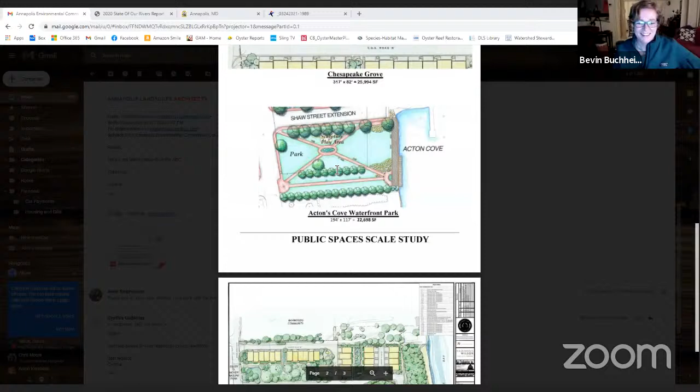It was a one-page introduction, then an enlargement of the park, and then an illustrative of the whole site. So the third page in that - I've got it up. Can you see my screen? Thanks, Allison. Is this what you're looking for? Yeah, if we can get that a little bigger.

I know you're all very familiar with this site. It's 5 acres between Bembe Beach Road and the Chesapeake Bay. This project goes way back - interaction with planning and zoning started in 2010. I think Debbie and I started working on the project in 2012, and Leo joined several years back. But even before 2010, there was a 5-year annexation process, so really this project started in 2005.

Over the last 11 years that it's been actively in planning, it's gone through a multitude of iterations. The straight zoning without any constraints allows 61 units on this site, and the project as proposed has ranged between 40 and 45 units, with the most recent iteration submitted at 40 units. So we're basically 21 units below the strict zoning allowance.

What we've really looked at is providing beach access for the public tied to this project. There are a lot of technical details of how to manage, maintain, and organize that, and the various responsibilities between city and HOA that still remain to be ironed out. But I think we all believe more people should have access to the Chesapeake Bay, so that's one thing this project delivers.

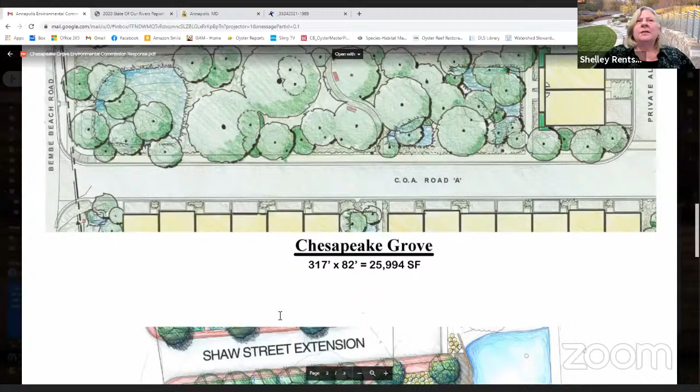Another thing that Theo Rogers hasn't really been acknowledged for is building the Grove - the park, which is the central open space in the project. If you go back one page, it's basically roughly the same size as the park at Acton's Cove. So it's really nice to have an open space that's not just a residual, peripheral, unresolved open space, but actually designed as an environmental wooded park for the community.

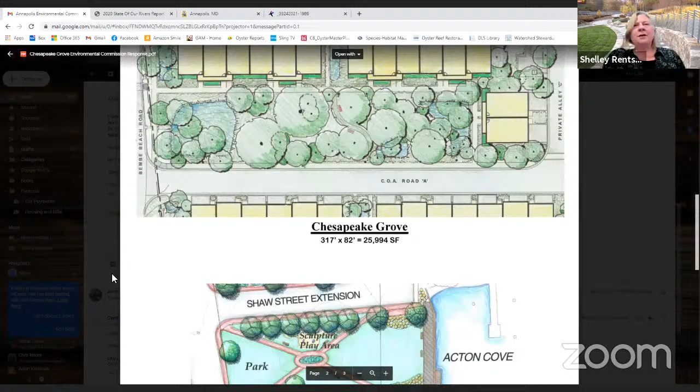It has sidewalks on both sides, so there's plenty of access through mulch paths through the wooded zone and several different wet areas that are processing stormwater - there's all kinds of stormwater on this site, as you know. So one key element is this park space, which again is roughly the same, a little bit bigger than the Acton's Cove Park.

If you go back to the main plan, another thing we worked hard at is really engaging the wetlands, as opposed to having them tucked behind buildings. You can see the road bows around the wetlands, and that darker line represents a living wall, which we've used a lot. It's only 3 or 4 feet high - not a major wall - but rather than structural footings in a wall that doesn't breathe and isn't green, a living wall is basically an armored slope, usually like a 1-to-1 slope or even steeper.

But the idea is essentially tying what's called socks or filter fabric tubes back into the landscape, and then planting the face of the wall with native plants. So that's a green technology that we think will really allow people to see the beauty of the wetlands.

Another feature we have is a small drop-off area where you see this circle. As people want to go down to the bay, they'll have a place to park and unload kayaks and go down to the water. There's been some preliminary discussion on having that also serve as a memorial circle, because there's all kinds of fascinating music history, African-American music tradition that happened on Carr's Beach and this whole area.

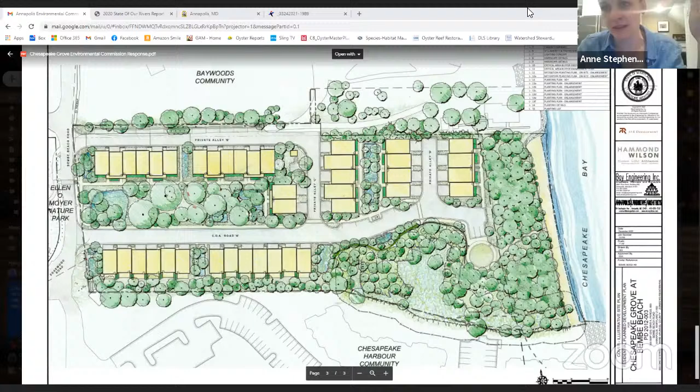I appreciate you coming, and I appreciate the update on the project. I'm a little mixed up about what's coming next, because it seems like the Planning Commission got back to some folks on staff this evening, and you all are here now. It sounds like you're working on the next iteration. So if you could give us an overview of where you see the process, and also when you think we as a commission could be helpful with additional questions or comments or participation in future meetings, that would be helpful.

Sure. So where we are right now is we submitted our work session with the Planning Commission, and we've had two since I've been involved, to narrow down what we really can and can't do. That's where we came up with the reduction in unit count and the reconfiguration of some of the areas and the stormwater. That submission was made, and there's about 15 city agencies that provide reviews of it. If you think herding cats sounds difficult, try and get 15 people at the city to do their homework on time — it just doesn't happen. It was due about three weeks ago.

But in talking with Cynthia, we should have all of those comments back, and they'll be available on eTrackIt. They've promised us those next week. So what we do is a point-by-point response to each one of the comments, many of which are redundant with yours about issues about trees and access and all of that. We take our time to respond to all of those in a way we think will be successful. Matt Waters looks at stormwater again, the fire department looks at access, the police look at our system — all of those things are evaluated again.

And at that point, they might deem it complete for final Planning Commission approval. So we'd be really lucky, I think. I'm going to guess if we could get something like that together for formal submission and back in for a public hearing in June, it would take an act of God, but I think we're shooting for it.

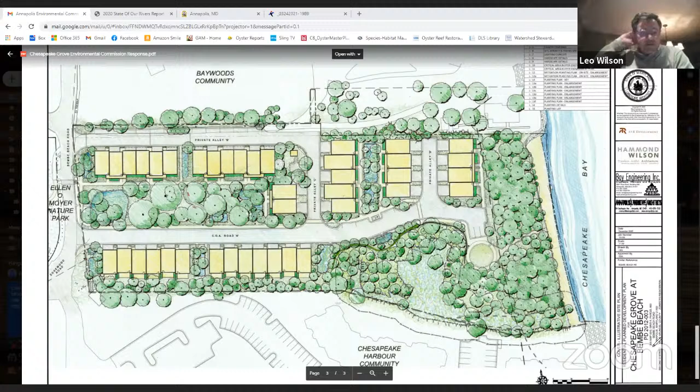Well, we'll take responsibility for making sure you know. Shelley's reachable, I'm reachable. Theo wants to be a good neighbor, so that's why we wanted to join you tonight. I know the city replied in writing to some of the comments, but we're taking them all into account. We're trying to make sure we're doing a good job too, because I want to do the next one, and if you guys don't think we did a good job, it just gets harder.

Well, thank you so much. I appreciate it, appreciate you taking all this time and coming here on pretty short notice too. No problem, thanks for having us.

Bill, did you have a question? I'm sorry, I saw your hand up. Yeah, thank you, Bevin. I just had a quick question. You mentioned LEED certification, and I was curious if that included solar panels on the roofs.

That's a good question, it came up on another project recently. Solar is only one option of many. What we're finding right now is that solar is a heavy lift for projects like this. You can provide the space for it, but the cost of the infrastructure combined with the fact that the technology is changing so fast makes it hard to mandate. I think there's more low-hanging fruit that's easier to incorporate and pays greater dividends - for instance, a more robust insulation system for these homes, high efficiency equipment for the mechanical systems, windows that are super efficient, and looking at the durability of materials over time. I'm not saying it's not a possibility, and each homeowner may decide to add them, and we'll make sure there are provisions in the structure and electrical system to do it, but we can't mandate that for each individual owner - there's just not a way to do it. But there will be parking spaces for electric cars, that type of thing will be mandated. But solar is kind of a long reach for this project.